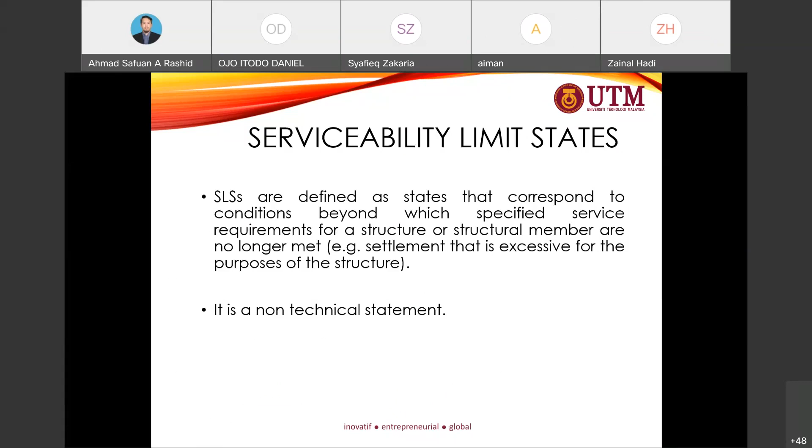It is not a technical statement. It is more related to what we call the comfort of the user. So the limit state considers the functioning of the structure or structural member under normal use, the comfort of people, and the appearance of the construction work. This should be classified as serviceability limit state (SLS).

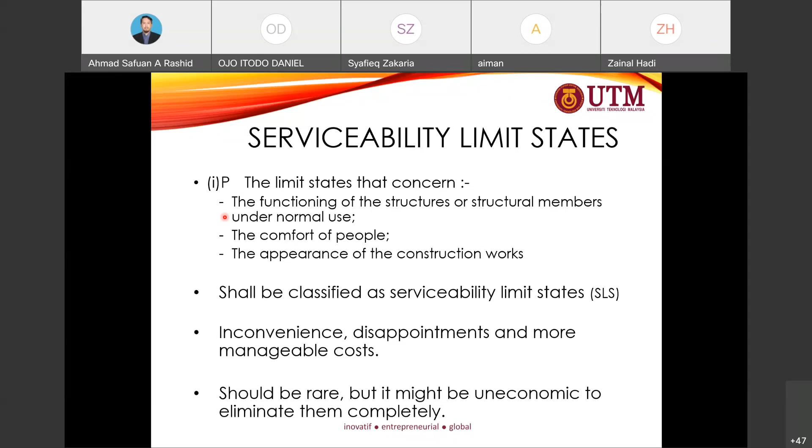So in Eurocode 7, we can find that this is marked as P, meaning it's compulsory, mandatory to follow, to make sure we comply with the SLS as well. Inconvenience, disappointment, and more manageable costs should be rare, but it might be uneconomic to eliminate them completely.

So this is the cost due to excessive settlement, where we can find cracks happening due to settlement, where there is uneven height of the structure, so cracks happen in the structure. Although we can consider it stable to be used, however it's not very comfortable for the user to stay or to use.

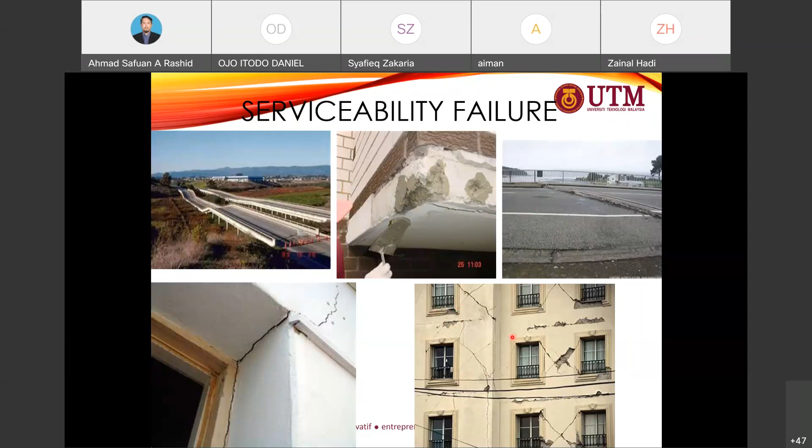For example, the bridge building, for this case they need to stop or slow the vehicle. It's not very comfortable to stay in this building, although the rent is very low. So that's why in any design we should consider the SLS and also the ULS.

So who should carry out geotechnical design? Part one provides a useful, although optional, definition of categories of geotechnical structure. For example, geotechnical category 1, GC1, includes relatively straightforward structures in which routine methods, including prescriptive methods, may be used. While the code makes no attempt to define level of competency, an experienced civil and structural engineer should be capable of preparing the geotechnical design basis for category 1 structures.

So category 1, for example a very simple structure. Let's say, for example, a guard house, it's very small. So there's no need for a thorough site investigation. We can carry out, for example, just a Mackintosh probe only to get the ground information. So no need for a very competent or experienced civil and structural designer. Somebody who is good in construction can also design this guard house, under category GC1.

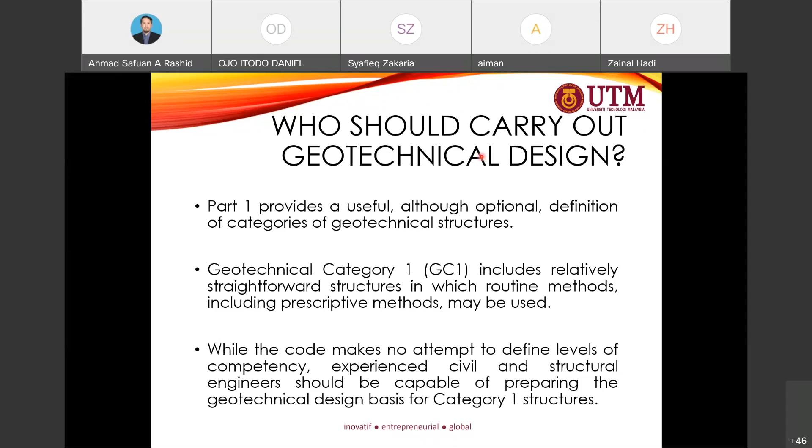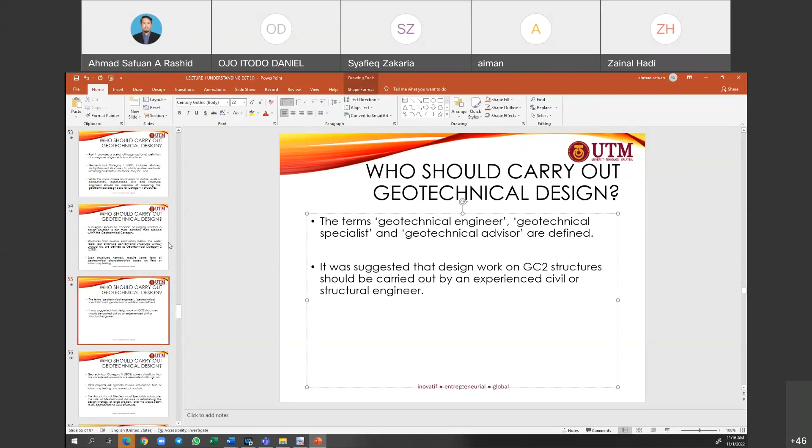A designer should be capable of judging whether a design situation is not more complex than allowed within the geotechnical category. So for GC2, structures that involve excavation below the water table but are otherwise conventional structures without unusual risk are defined as GC2. This is the common type of structure, where, for example, we want to have a foundation, so we need to install and build the foundations below the water table. So it's considered as GC2.

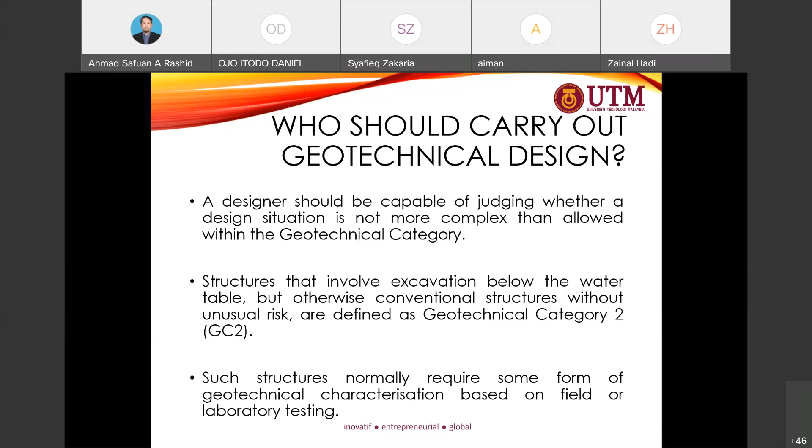Such structures normally require some form of geotechnical characterization based on field or laboratory testing, so it's required to carry out lab tests, so we put it under GC2. The terms geotechnical engineer, geotechnical specialist, and geotechnical advisor are defined. It was suggested that design work on GC2 structures should be carried out by an experienced civil or structural engineer. So at least it should rely on an experienced civil and structural engineer.

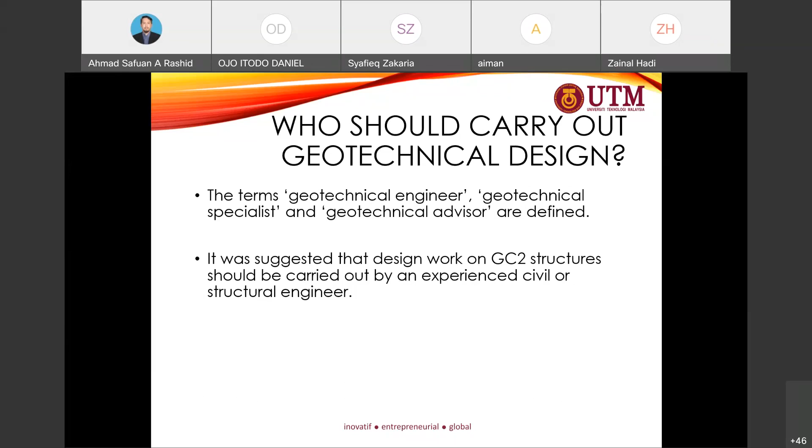Then we have GC3, which covers situations that are considered unusual or associated with high risk. GC3 projects will typically involve advanced field or laboratory testing and numerical analysis. The Association of Geotechnical Specialists advocates the role of geotechnical advisor in establishing the design strategy of large projects, and this would seem appropriate to GC3 structures. For example, tunneling, building a tunnel, or any high-rise structure, should be considered under GC3.

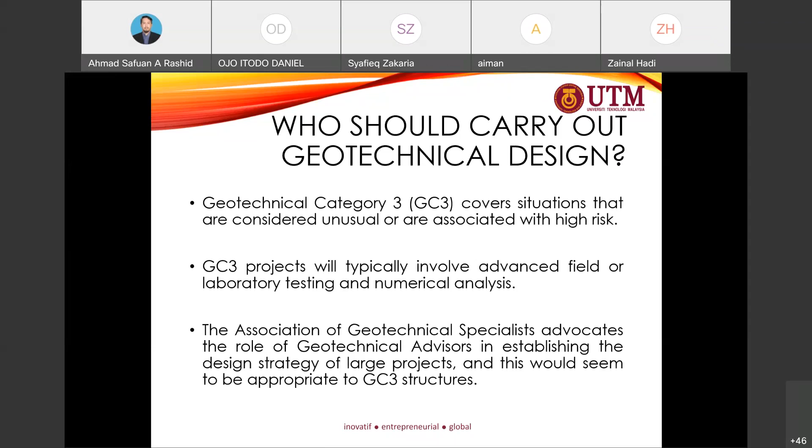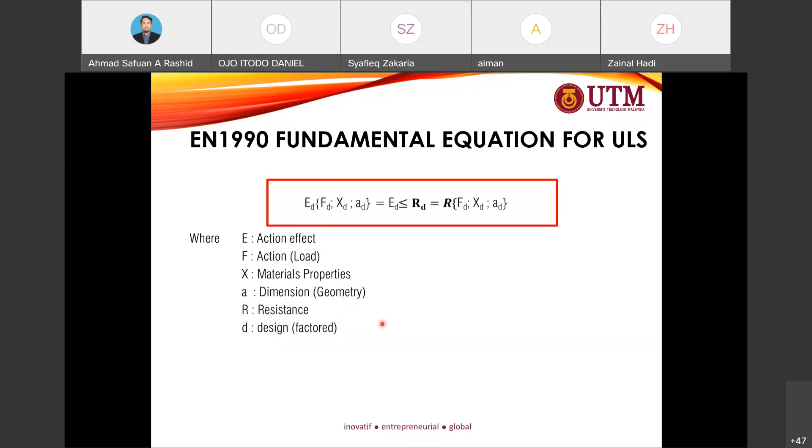So from this fundamental equation, they include or multiply with a partial factor. This partial factor we need to refer to, the Euro code or the Malaysian standard, in terms of what is their value. So then, for example, partial factor, then we multiply with the action loads. For example, we have... I need to check first, the terms.

We have the permanent and variable loads, similar to the common British standard where they have a dead and live load. So permanent refers to the dead load, then the variable refers to the live load. So then we need to refer to the table in the Euro code for what will be the number for the partial factor.

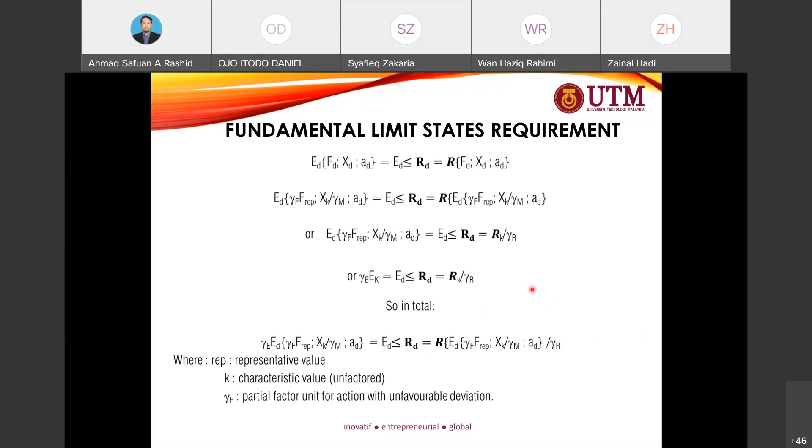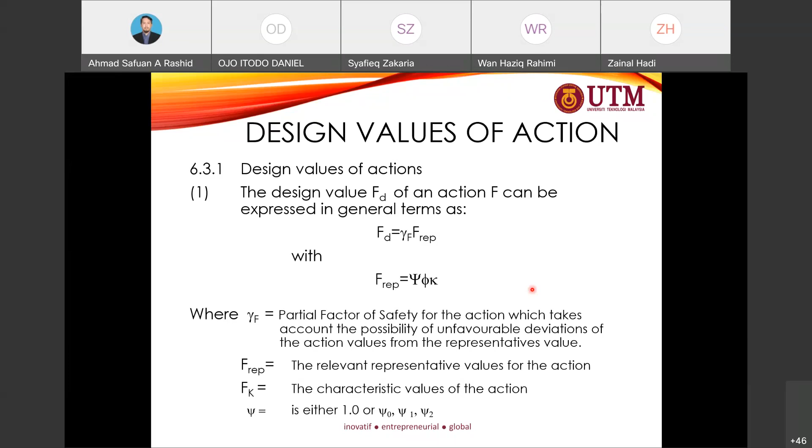So for the design value of action, the design value FD of an action F can be expressed in general terms. So FD, the gamma F, we may refer to the partial factor of safety to get the value for the FD. So for the action we normally multiply. This is the same that we have discussed.

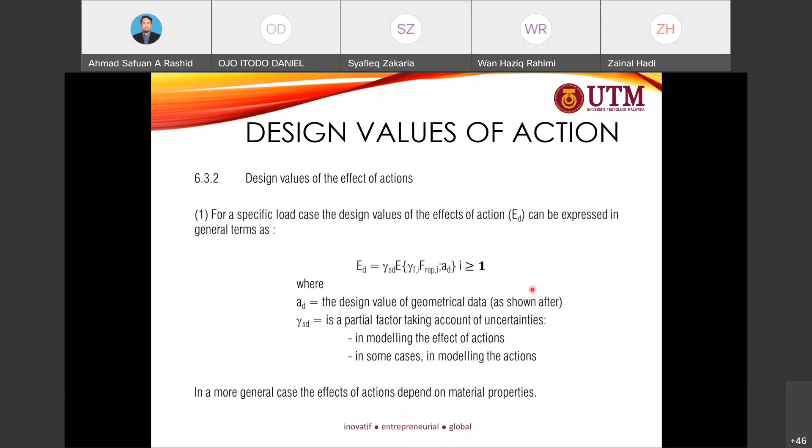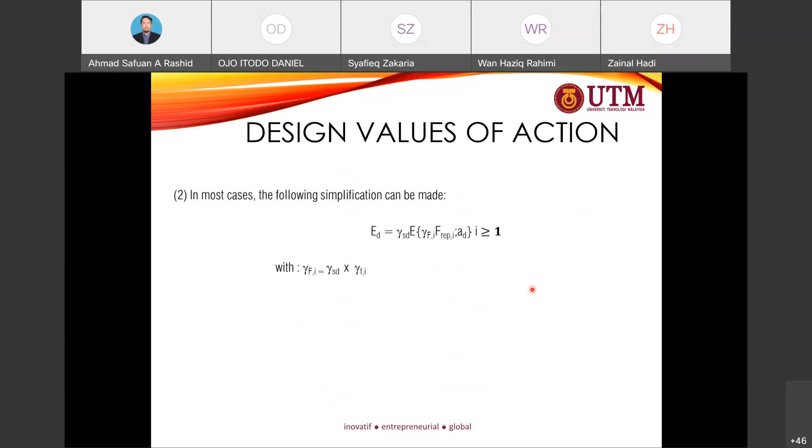In most cases the following simplification can be made: for the action normally we multiply. And for the material, the design value XD for material or product property can be expressed in general terms as XK over gamma M. So for the material, we normally divide with the partial factor of safety value.

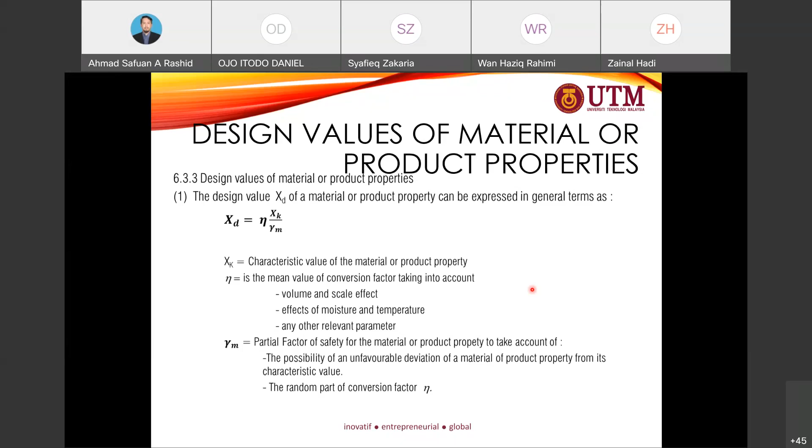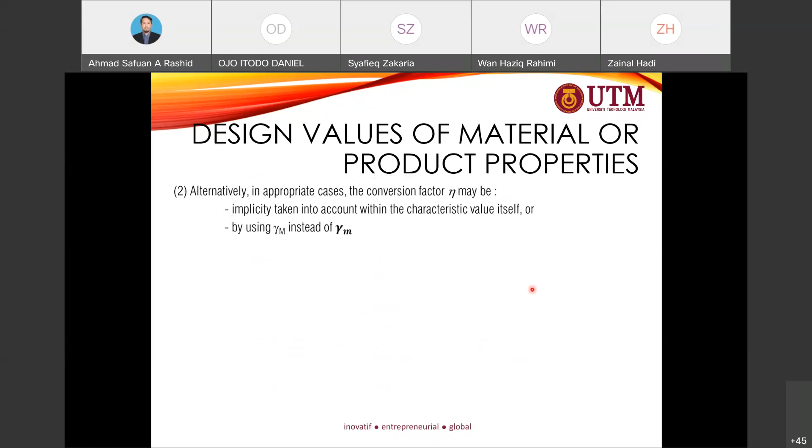So the eta is the random part of conversion factor, they call it eta. Alternatively, in appropriate cases, the conversion factor eta may be used, implicitly taken into account within the characteristic value itself, by using gamma M instead of gamma M.

So basis of geotechnical design. Okay, general design. Section 2, page 9, 2 to 9 onward.

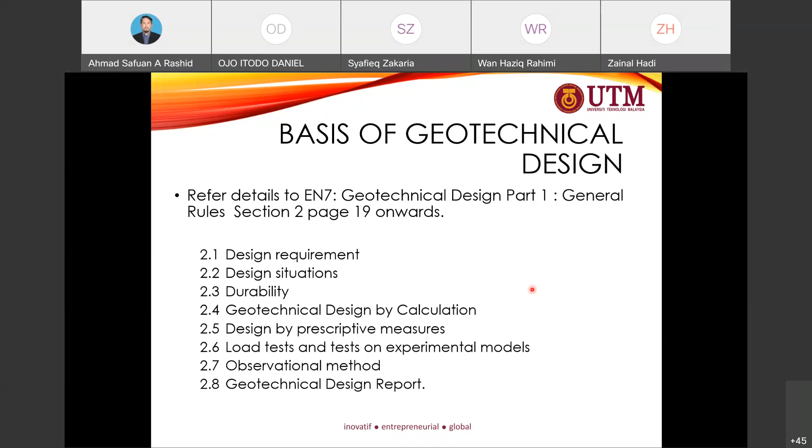So design requirement, design situation, durability, geotechnical design by calculation, design by prescriptive measure, load test on experimental model, observational method, geotechnical design report, also included in the Eurocode 7.

Eurocode 1997 provides 3 design approaches to control the strength of soil and applied load. So they implement the M and R. Soil strength such as cohesion, friction angle, and dilatancy angle will be reduced using the partial factor. A is more related to action, load surcharge will be increased with the partial factor. So reduced means that they divide, increase means that they multiply.

For the design approach, they have 3 types of design approach. For example, for design approach 1, they call it DA1. There are 2 combinations from design approach 1: combination 1, A1, M1, R1, and combination 2, A2, M2, R1.

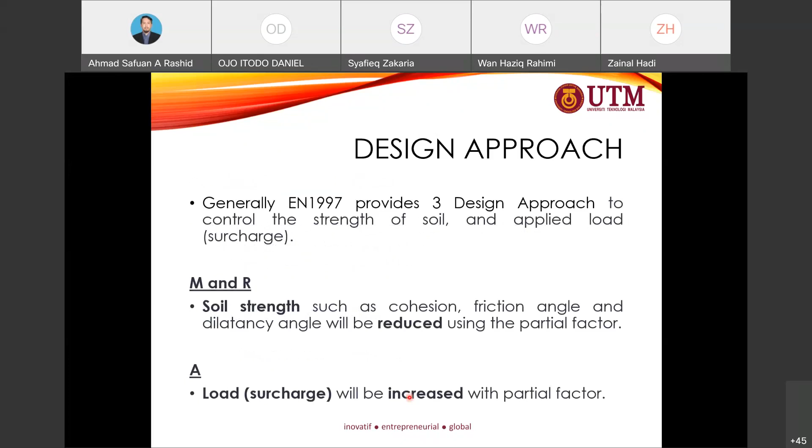From what we have discussed previously, we have M, R, and A. Each of M, R, and A have their own value to be included as a partial factor. Then we have design approach 2, where we need to use a combination A1, M1, and R2.

So this is the design approach with the coefficient number for a shallow foundation. We may calculate first for design approach 1, combination 1, using A1, M1, and also R1. For combination number 2, we should use A2, M2, and also R1. For design approach 2, combination of A1 plus M1 plus R2 should be included in the design calculation. So this is the number of partial factor safety.

We may learn this in the shallow foundations lecture. A is referred to the action, M is referred to the material, R is referred to resistance. So we have bearing and also sliding. For example, if we are discussing bearing capacity, we refer R1 as bearing.

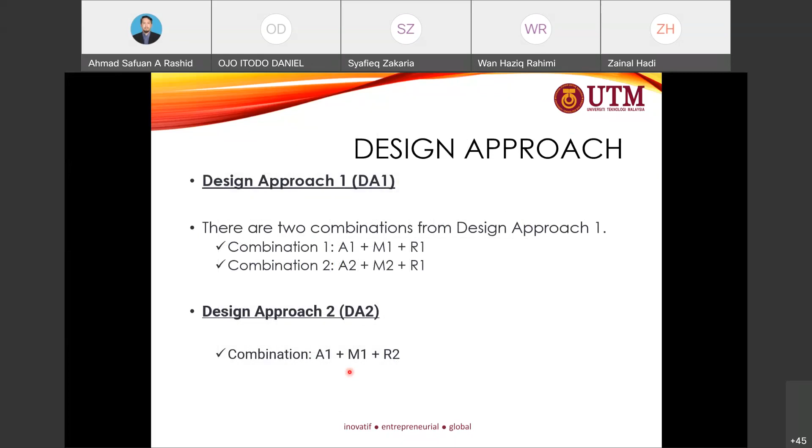So for Malaysian case, we only refer to design approach 1. Why do we use only design approach 1? Because we refer to the United Kingdom, that's why we only use design approach 1. So this is the combination of design approach 3: either A1 or A2 will be used, plus M2 and also plus R3. It means that for design approach 1, we need to have two calculations.

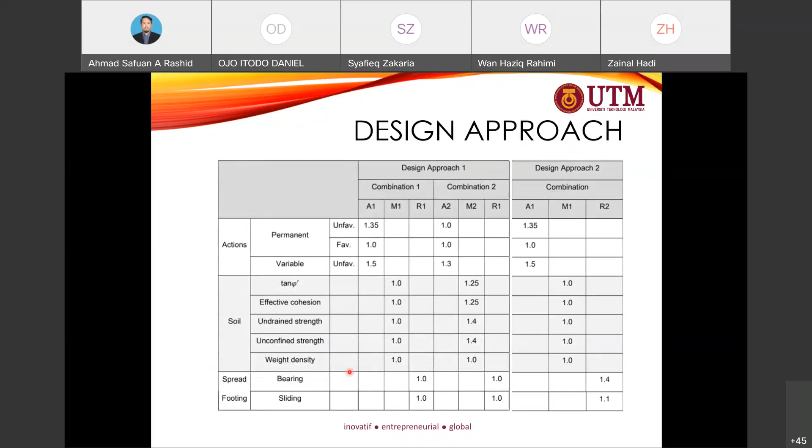Both of the calculations should satisfy the ULS, which is greater than 1. So we need to calculate for combination 1, and then calculate for combination 2, and then compare with the ratio value, whether it is greater than 1 or not.

So this is the list of countries with their design approach. As I told you, Malaysia is referred to the United Kingdom, so that's why we only consider design approach 1 in our design. So there are some countries using design approach 2, and I guess the majority of countries are using design approach 2, and only one country using design approach 3.

So there are some countries either using design approach 1 or 2, and some countries using design 2 or 3, and only Ireland or Czech using design approach 1, 2, or 3, while other countries are unknown - perhaps they use their own design standard, or they only refer to the CEN, or they have their own design approach.

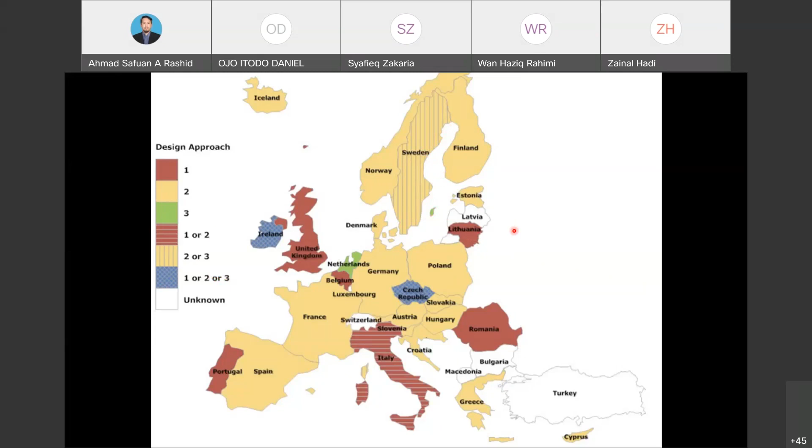So what combination of partial factor to use? Combination 1 involves the consideration of factored action, unfactored material and resistance. Combination 2 considers unfactored action, except unfavorable variable action, and factored material properties.

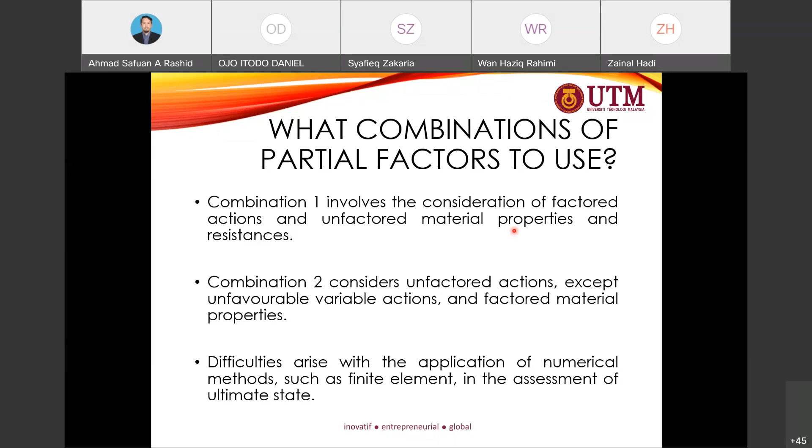Difficulty arises with the application of numerical methods such as finite element in assessing ultimate state. However, nowadays there are a lot of software or numerical methods that include the application of EC in their design. For example, Plaxis also has EC based design.

So in this case, the factoring of soil strength or stiffness can lead to the generation of inappropriate mechanisms in the analysis. Uncertainty can also be experienced in assessing slope stability, where it can be difficult to separate favorable and unfavorable action, and in the design of anchors, where the design and execution could provide conflicting advice.

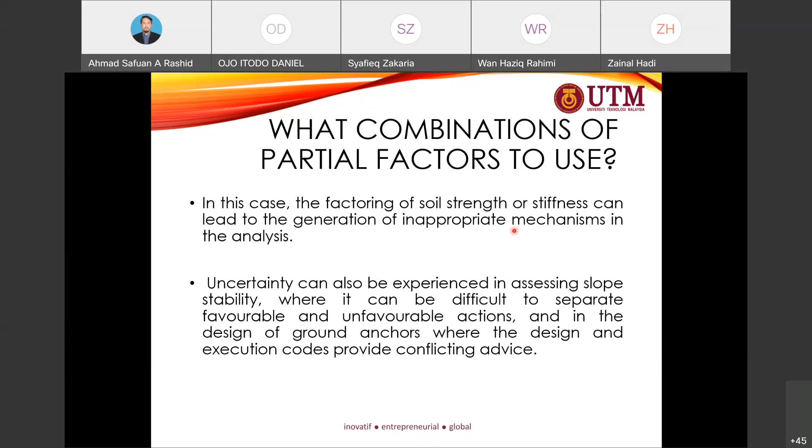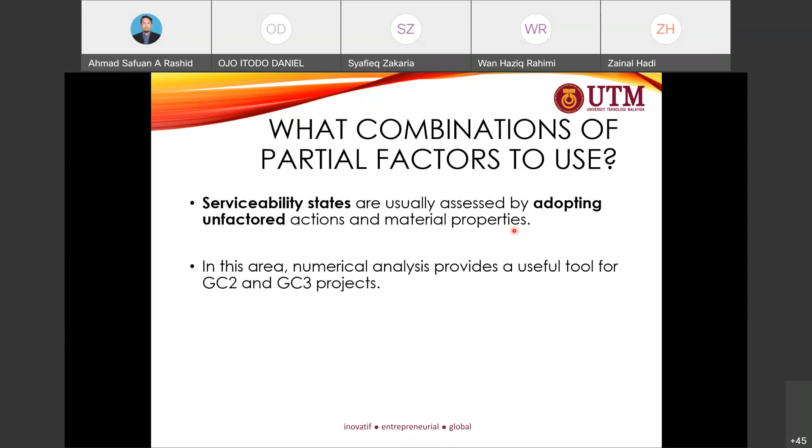So serviceability states are usually assessed by adopting unfactored action and material property. In this area, numerical analysis is useful for GC2 and GC3 projects. Normally for numerical tools, the output is on deformations. That's why serviceability states are usually assessed by adopting unfactored action and material properties.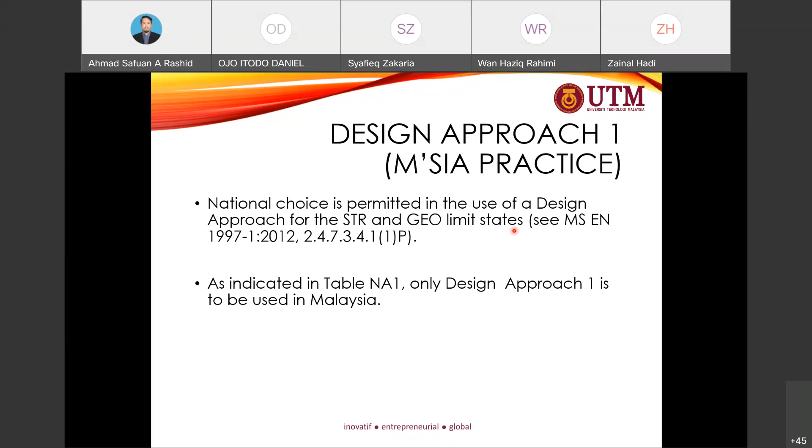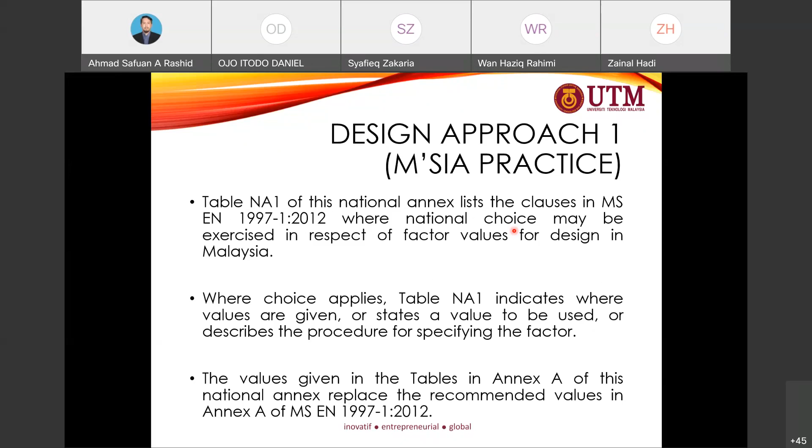So table NA1 of this national annex lists the clauses in the national standard where the national choice may be exercised in respect of factor values for design in Malaysia. Where choice applies, table NA1 indicates where values are given or stated to be used, or describes the procedure for specifying the factor. The value given in the table in Annex A of this national annex replaces the recommended value in the Annex of EN 1997 Part 1.

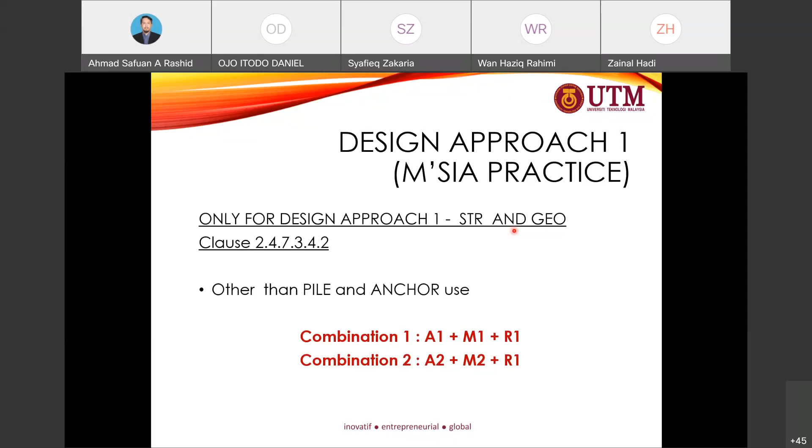So Malaysia practice uses design approach 1. Other than pile anchor, use combination 1 and 2. For axial load and pile anchor, they use this combination A1 M1 R1, A2 plus M1 or M2, and R4. So we may learn this in the deep foundation section, where M2 is for calculating any unfavorable action such as negative skin friction or transverse loading.

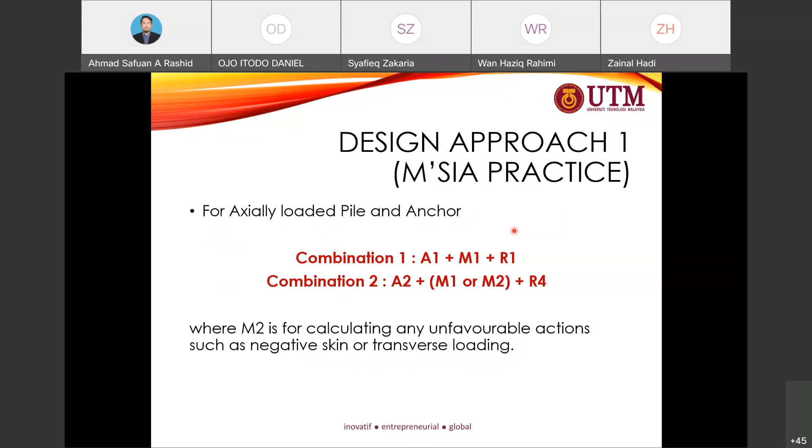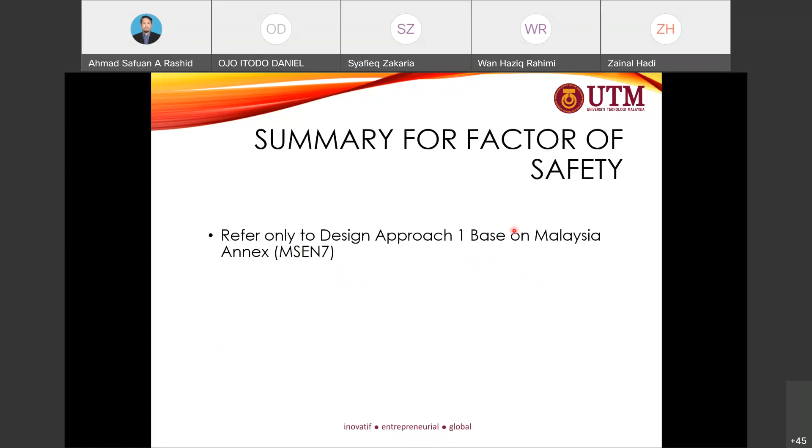Refer only to approach 1 based on the national annex. So this is the list for all deep and also shallow foundation. So this is what we call A, while this is M, while this is R for shallow foundation, for deep foundation, anchor, retaining wall and slope.

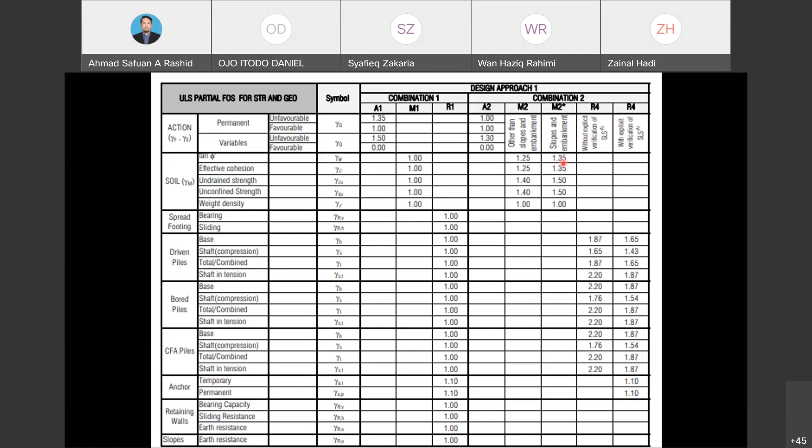So this is to be used for combination 1, and this is to be used for combination 2. M2, although it also relies on the condition, other than slope and embankment we use M2. For slope and embankment, we use M2 asterisk. So R4 is more related to the SLS. If we consider the SLS, we use R4 here. If you are not considering the SLS or the deformation, we use R4 in this column.

So applying for inverse load, in design situations where the ground strength acts in an unfavorable manner, such as downdrag or heave on a pile, the design value of unfavorable action may be obtained by applying the inverse set of M2 partial action factors to the characteristic unfavorable action, and applying the inverse of the M2 set of partial material factors to the characteristic material strength to obtain the design strength and hence the design unfavorable action. This is just an explanation of when we are dealing with this situation of down drag or heave.

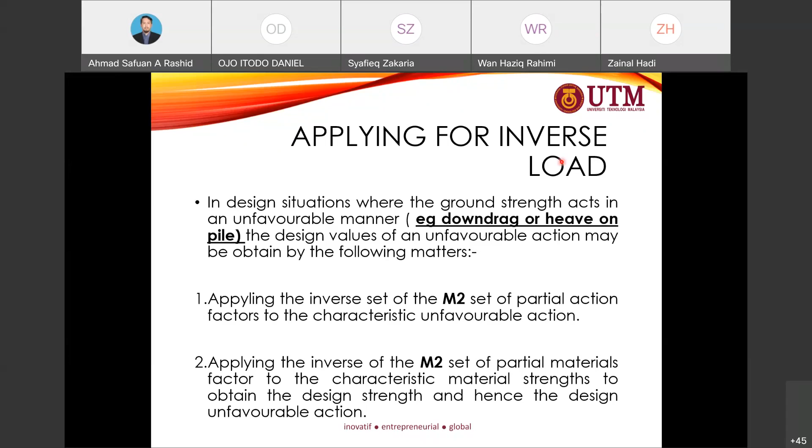However, we will not discuss this in detail in the deep foundation for this part. So the recommended value for partial factor of negative skin friction, this is the value if we are dealing with negative skin friction.

So this means that negative skin friction should be included in the design as a positive value, as an additional load value.

Sorry, I have a call.

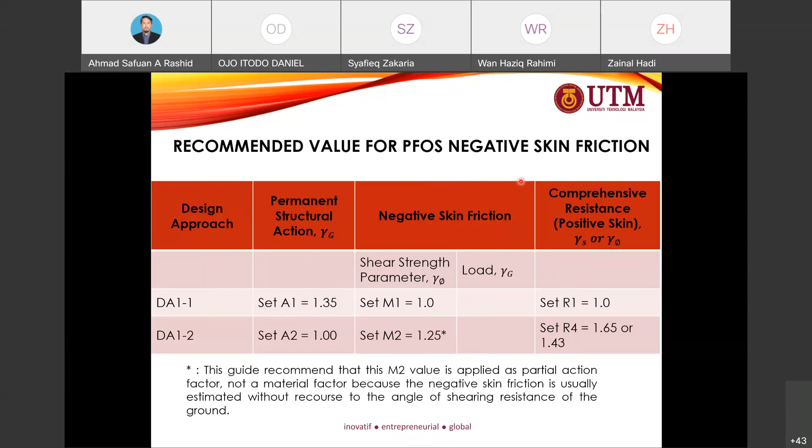So then there is a model factor, they call it MF, and this is used for pile design. We may look at this model factor in the design of the pile.

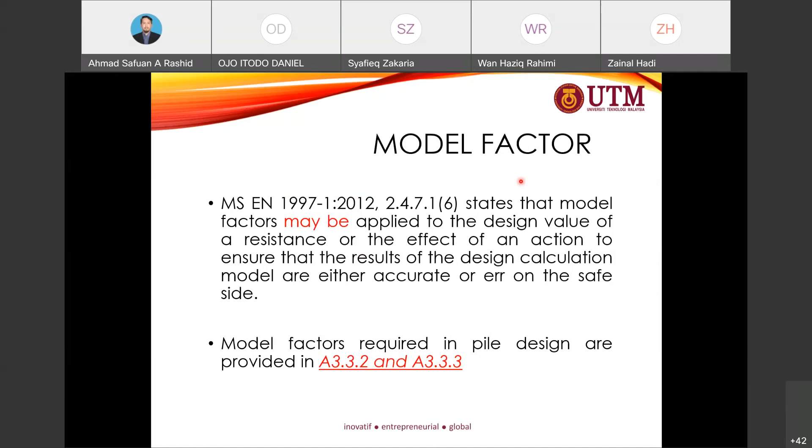The value is around 1.2 to 1.4, depending on the characteristic of the designer, documentation, and whatever testing we use. For example, if they carry out a maintain load test, the confidence level is high, so the model factor is reduced to 1.2, compared to if we only use a site investigation result with a very experienced designer, so we just put 1.4.

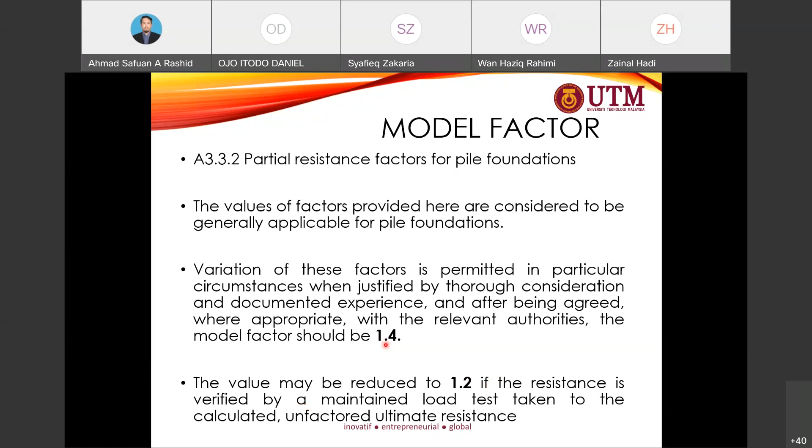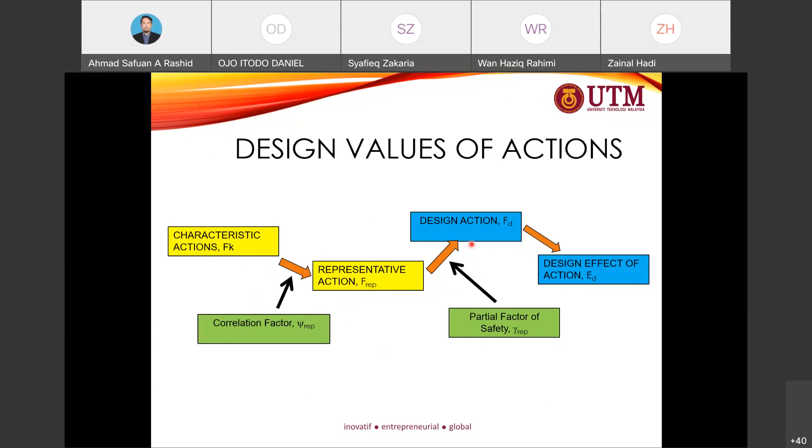So this is the flow for the design value of action, starting from the characteristic action. We apply the factor, then we come up with the representative action, then apply the partial factor of safety, then apply the design action, so then we get the design effect of action. This is the summary of the geotechnical design by calculation.

The detailed discussion we may discuss in the next class, under shallow foundation and also under deep foundation.

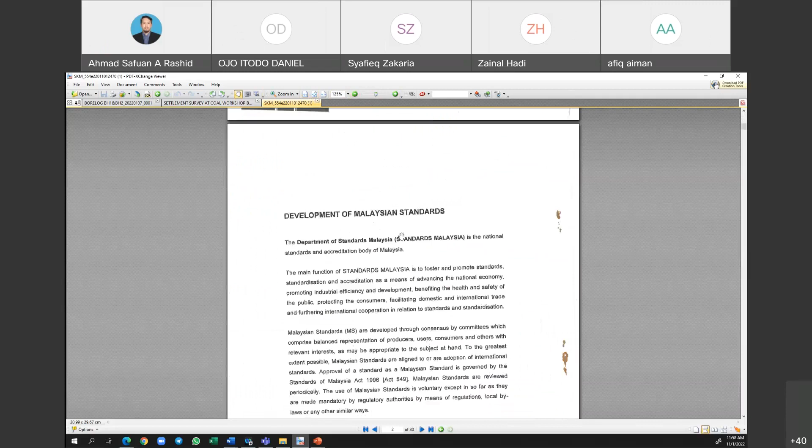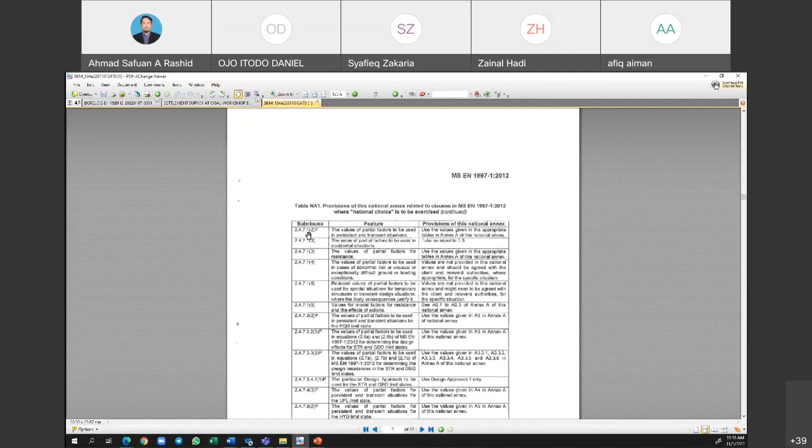So this is the table that NA1 provides for this annex, related to the clause in when national choice is to be exercised. This is the subclause which discusses all these features and provisions.

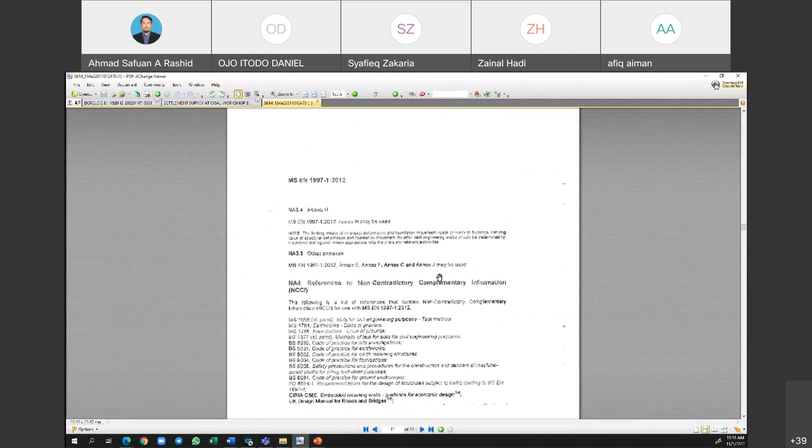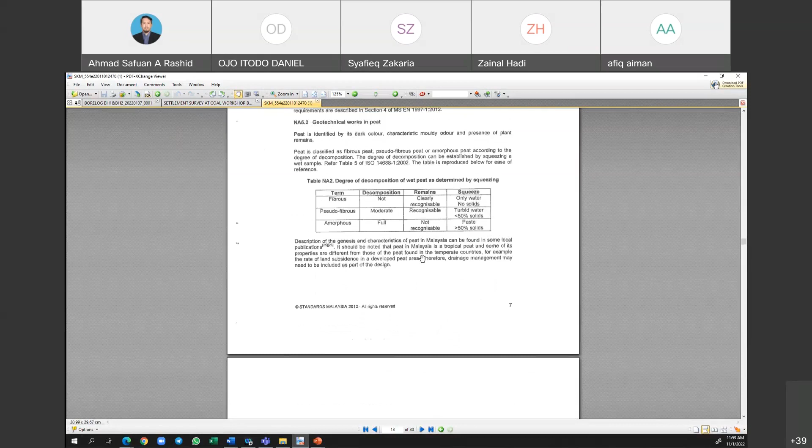So this is the section discussed on the peat. It's most probably different from the one discussed in the Eurocode because we have different types of peat.

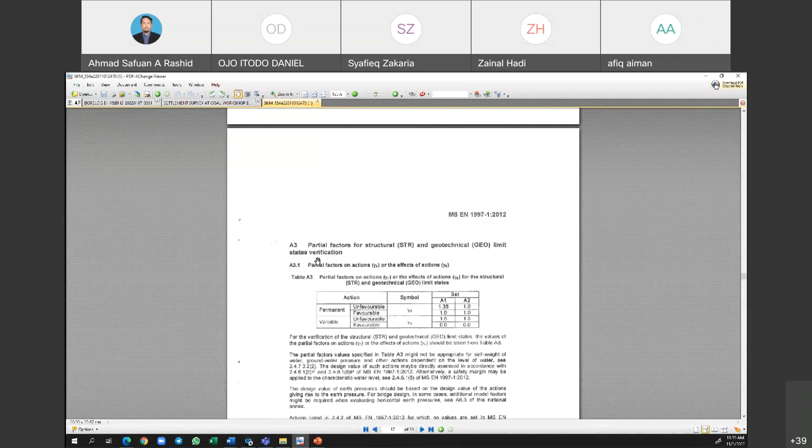So this is all the values for the partial factor for soil, this partial factor for STR and geotechnical limit state. This is for action, but this is for soil. This is the resistance for the shallow foundation, but this is for pile.

It depends on the type of installation. We have here continuous flight auger, this is bore pile, and this is for driven pile.

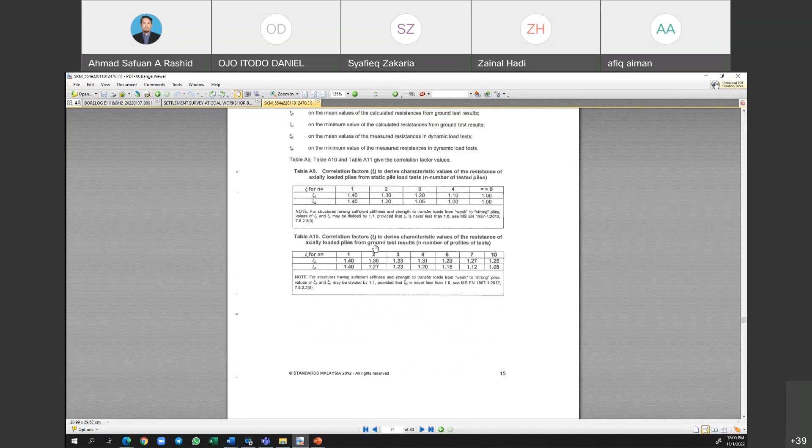This is for the pile foundation based on xi. They use the xi value based on the number of static maintain load tests, and also based on ground test. For example, if we have more, a lot of what we call maintain load test, for example greater than 5, the xi value is equal to 1. If we have less, we need to apply and divide by 1.4. It means that the confidence level increases where we have more data from the maintain load test, similar to the ground test. However, the ground test is not as accurate as the maintain load test.

This is the dynamic impact test, and this is for anchorage. I have stated before it's not applicable in Malaysia, so we need to refer to the Eurocode.

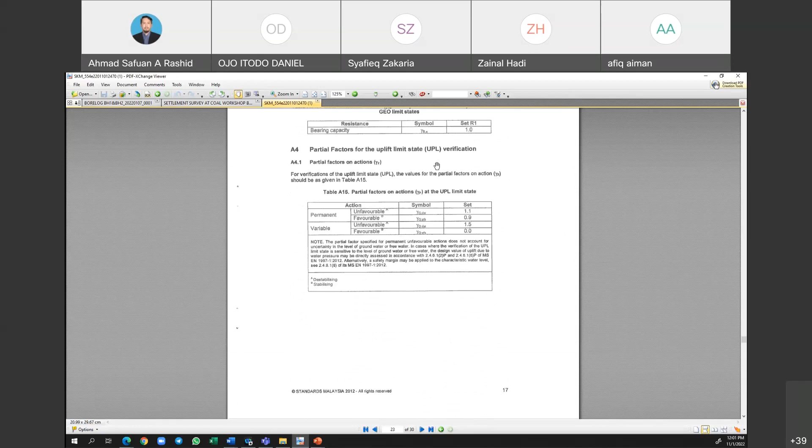So this is for the UPL problems, and this is for the HYD.

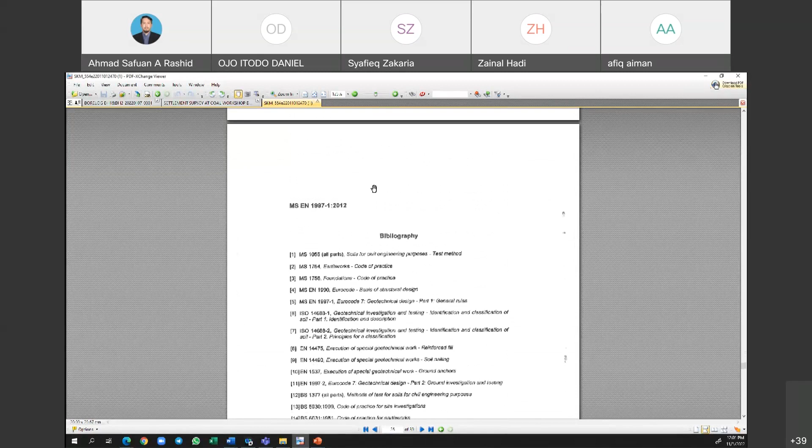So this is a discussion on the model factor for the pile design. In here, this is the reference used, and this is the name of the members of the technical committee. We have here Prof. Ramli and Dr. Jamaluddin from the academician part, and the rest are from the authority and also from IEM, or from the consultant.